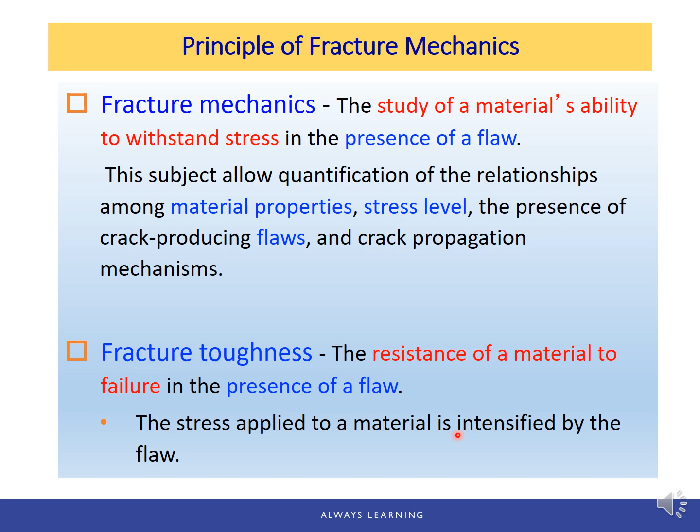We will also use another term, which is the fracture toughness. Fracture toughness is the resistance of a material to failure in the presence of a flaw. And the stress applied to the material is intensified or amplified by the flaw.

After comparing the ideal materials to real materials, we find that the measured fracture strengths for most materials are significantly lower than those predicted by theoretical calculation based on atomic bonding energies. So here we have the stress-strain curve for a perfect material with no flaws. And this stress and strain, especially for the tensile strength, is calculated based on atomic bonding energy.

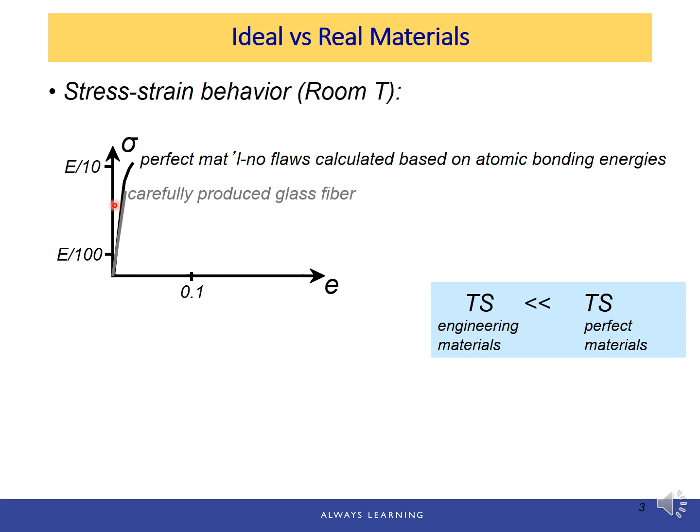Versus the real material, and this is a carefully produced glass fiber, which has a tensile strength that is lower than the ideal material. And also it's quite brittle because it doesn't have the plastic deformation. And next is typical ceramic. Again, it's a brittle material, but the tensile strength is much lower than the perfect material.

And next, we have typical strengthened metal. It's quite ductile, but again, the measured tensile strength is much lower than the perfect material. And lastly, we have typical polymers. It's even lower. So therefore, we say the tensile strength of the measured engineering materials are much lower than the tensile strength of perfect or ideal materials based on the calculation of atomic bonding energies.

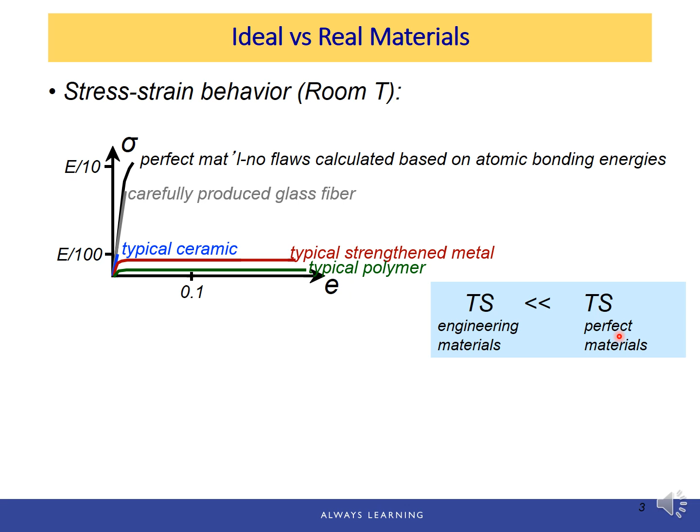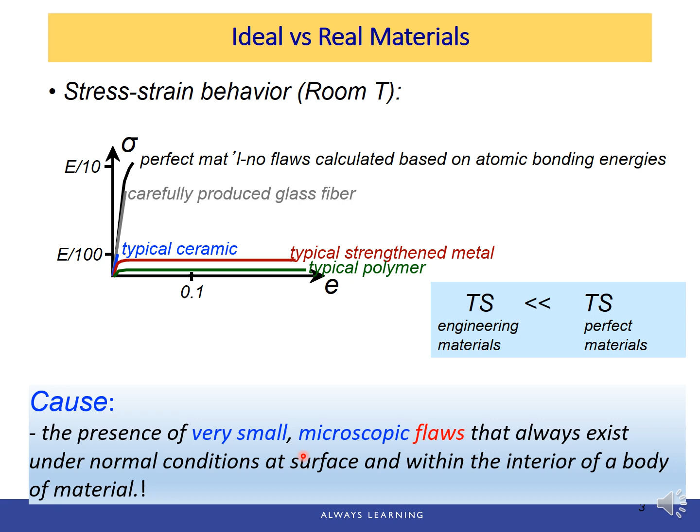And the reason can be explained by the presence of microscopic flaws or cracks that always exist under normal conditions at surface and within the interior of a body of the material. Flaws and micro voids at the surface of the material or within the material are stress concentrators or amplifiers.

So if the applied stress is sigma 0 on the piece of metal, at the tip of the crack, this value is much larger than the applied stress. So the relation between the stress at the crack tip here and the applied stress is described in this given equation, where sigma m is actually the maximum stress within the material at the tip of this crack, equals 2 times sigma 0, which is the applied stress, times square root of a over rho t. So let's explain the terms in this equation.

Rho t is the radius of curvature of the crack at the tip. And sigma 0 is the applied stress to the entire material. And sigma m is the stress at the crack tip, which is the maximum value. And a, if the crack is at the surface, then a is the length of the surface crack. But if the crack is within the material, is an internal crack, then we need to divide the length of the crack by 2 and then use in this equation. So we can say that half a is the half length of an internal crack.

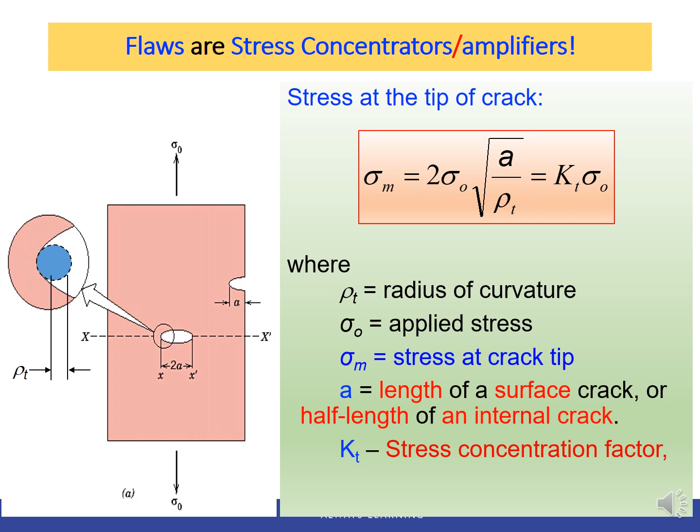And sometimes we combine this coefficient, 2 times square root of a over rho t, and we call it the stress concentration factor K sub t. The stress concentration factor K sub t, if we rearrange the previous equation, we can see this K sub t actually is the ratio between the sigma m and sigma 0, where the sigma m is the maximum stress at the crack tip, and sigma 0 is the nominal applied stress sigma 0.

So if you take a look at this stress profile, we can see that the magnitude of this stress decreases with distance away from the crack tip, or the stress at the crack tip is a maximum value. It's much larger than the applied tensile stress sigma 0. Or we can calculate K t, the stress concentration factor, with the length of the crack and the curvature at the crack tip, or the radius of the crack tip. So the stress concentration factor K t measures the degree to which an external stress is amplified at the tip of the crack.

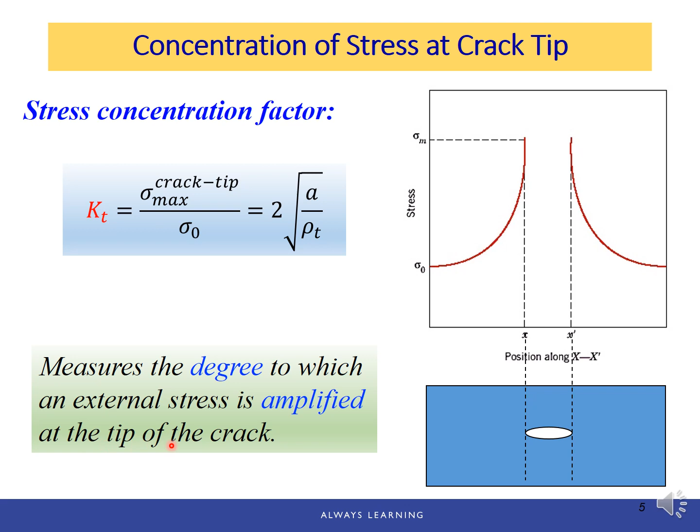Using fracture mechanics principles, an expression has been developed that relates the critical stress for crack propagation and crack length. This critical stress for crack propagation is the stress for the crack to grow. So when the applied stress is above this critical stress, then the crack starts to propagate or grow. But if the stress is below this critical stress, then the crack will not grow. So that's the critical stress for crack propagation.

And crack length is a. And now here we say the fracture toughness is K sub C. Didn't we just use a very similar symbol for another term, which is K sub T? So don't get confused by the two terms. They are very similar, but they are different. Fracture toughness is K sub C, and K sub T is the stress concentration factor. And this factor is a dimensionless number because it's the ratio between two stresses.

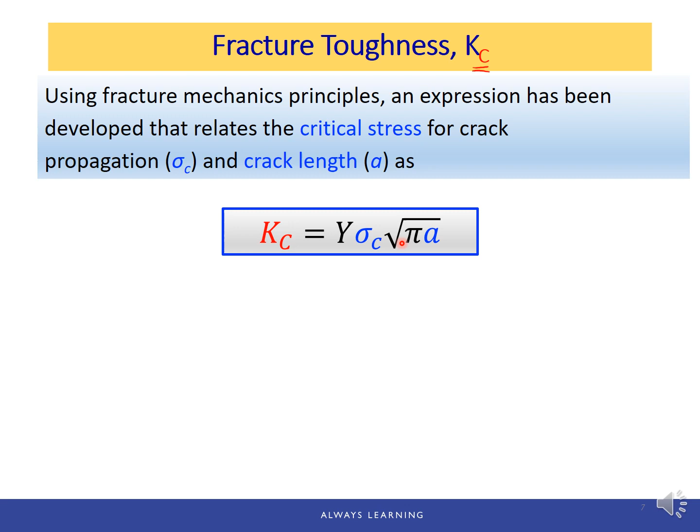Now, this relation is Kc, the fracture toughness, equals Y times sigma C, which is the critical stress for crack propagation, times the square root of pi a, where Kc is the fracture toughness, a property that is a measure of a material's resistance to brittle fracture when a crack is present. And it has a unit, which is the unit of stress, megapascal, times the unit of the square root of a, the square root of length, square root of meter, or psi, pound-force per square inch, times square root of inch. And sigma sub C here is the critical stress for crack propagation, and a is the flaw size.

Same idea: if it's an internal flaw, then we need to divide the entire length by 2. That will be the a value. But if it's a surface flaw, then it's just a. The length is just a. And Y is a geometry factor. If we have an internal flaw, then Y equals 1.0. But if it's a surface flaw, we use 1.1 for Y.

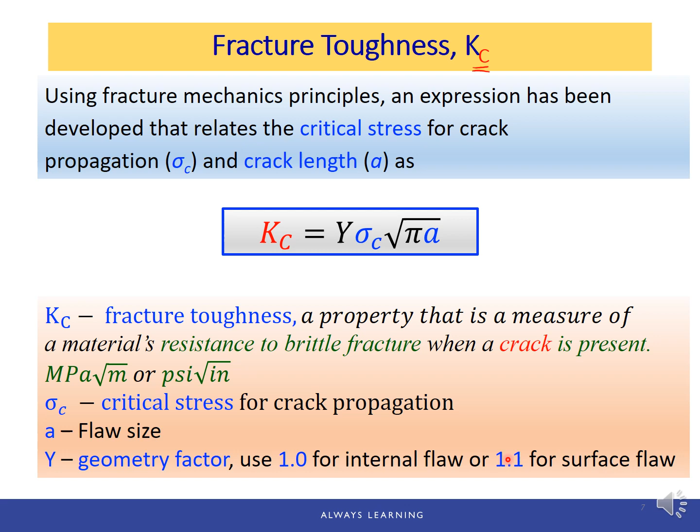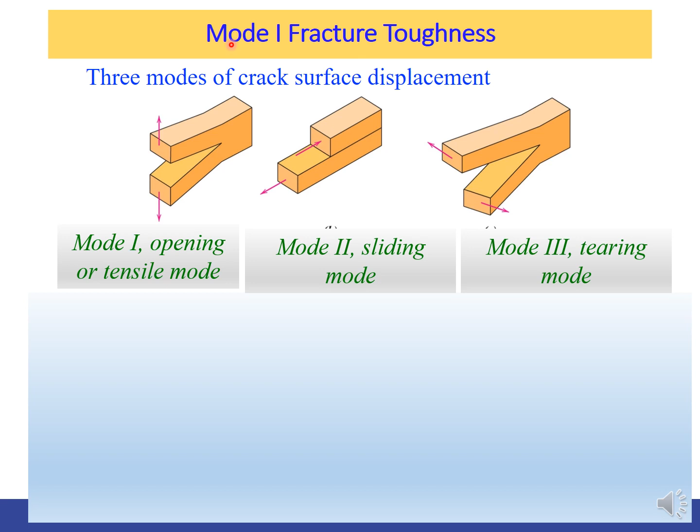For the crack surface displacement, there are 3 different modes, which are shown in those figures. The first mode is called the opening or tensile mode. The second, mode 2, is the sliding mode. Mode 3 is the tearing mode. But in this class, we will only focus on mode 1, fracture toughness, which is the plane strain fracture toughness.

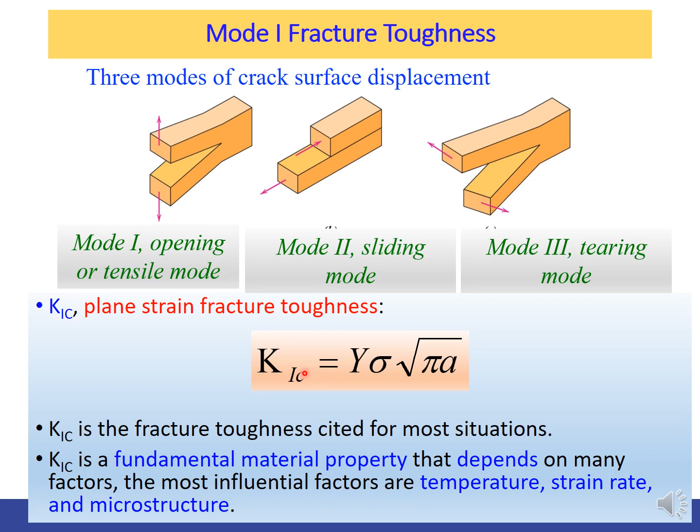And to calculate the plane strain fracture toughness is a very similar expression as before, but we just add a Roman numeral 1, which looks like I here, in the subscript to indicate this is the plane strain fracture toughness. It equals Y, which is the geometry factor, times sigma, which is the applied stress. So instead of the critical stress for crack propagation, sigma here used for plane strain fracture toughness is the applied stress. Times the square root of pi times a, which is the surface crack length, or half of the internal crack length. So KIC, the plane strain fracture toughness, is cited for most situations and is a fundamental material property that depends on many factors, and the most influential factors are the temperature, strain rate, and microstructure. But since it's a material property, in most of the calculations this KIC will be given, or you need to look for it based on other given information.

So in summary, the plane strain fracture toughness, KIC, is a material property. It is the resistance of a material to brittle fracture in the presence of a crack or a flaw. And this is the equation. In this equation, KIC is the plane strain fracture toughness, and sigma is the applied or imposed stress. And a is the flaw size. F or Y is the geometry factor. And we use 1.0 for an internal flaw, or 1.1 or 1.12 for a surface flaw.

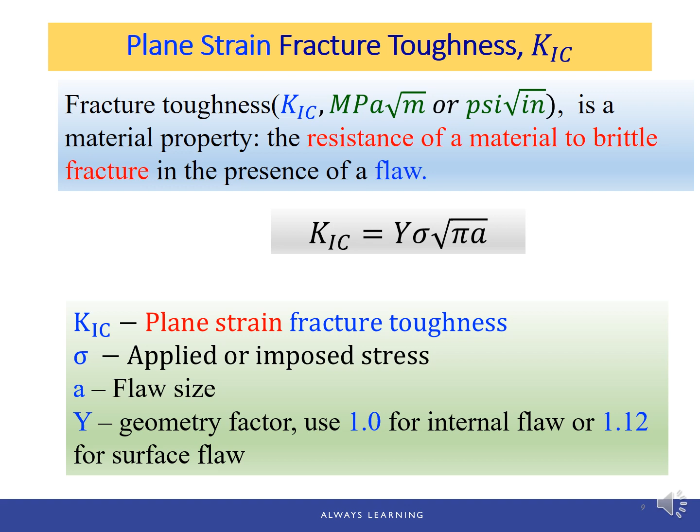So be very careful with the A values and the geometric factor. Sometimes you can see this factor expressed as F, or sometimes we use Y. They're all the geometry factors in the calculation of the plane strain fracture toughness. A is the flaw at the edge or on the surface, and if it's a surface flaw, then we use the length of this flaw, A, in the calculation.

But if it's an internal flaw, then 2A is the entire length. Therefore, in the equation, we need to divide the entire length by 2 to get the A value in the calculation. And for the geometry factor, the surface flaw has a geometry factor of 1.12, and the internal flaw has a geometry factor of 1.0.

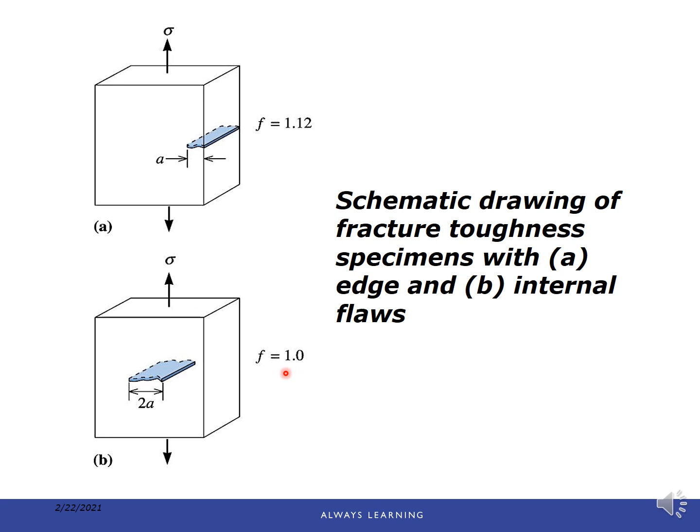So when we design against fracture growth, 3 variables must be considered. The first one is the plane strain fracture toughness, which is the material property. If we have chosen the material to be used in a certain application, this plane strain fracture toughness is determined. The second variable is the applied or imposed stress. When we design the structure, we may already know what the load is, or the value of the applied stress on the component. And A is the flaw size.

With 2 given variables, we can solve for the third one. So that will give us different types of design projects. The first type is if we know the material, so we know the plane strain fracture toughness, and we can also measure the internal flaw size or the flaw size at the surface. When we know those 2 values, we can find the maximum allowable applied stress on the component. The stress must be no bigger than this value. Again, this is a rearrangement of the plane strain fracture toughness equation.

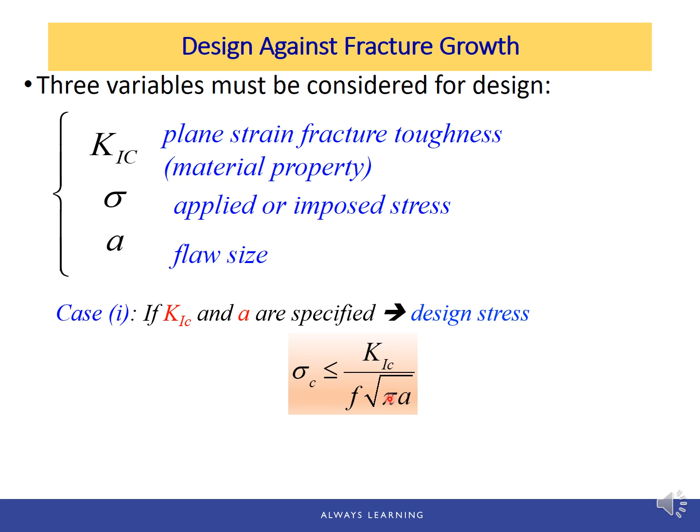The second design we can do is if we know the material, so we know the plane strain fracture toughness, and we know the applied stress, then we can calculate the maximum allowable flaw size. Again, this is the maximum allowable flaw size. As long as the flaws are smaller than this one calculated from the given equation, the material is safe to be used in the component or in the structure. Keep in mind that flaws or micro cracks are always present in the material. There is no perfect material.

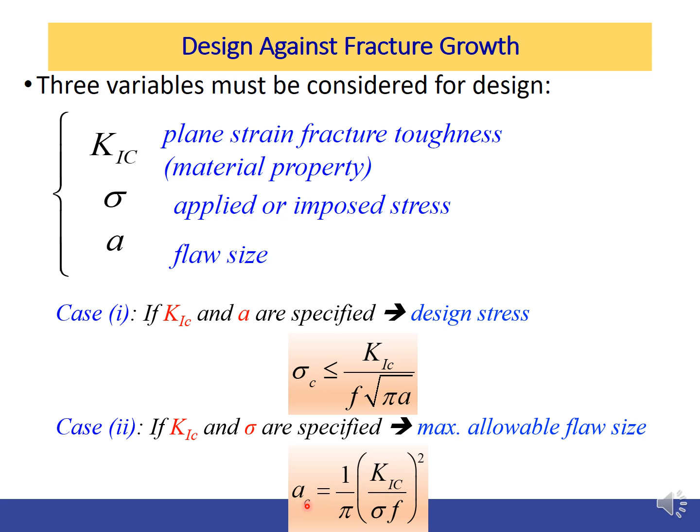Example 1. A large steel plate used in a nuclear reactor has a plane strain fracture toughness of 80,000 psi square root inch, and it's exposed to a stress of 45,000 psi during service. What is the maximum allowable size of a crack at the edge, which means at the surface of the plate, before the crack is likely to grow at a catastrophic rate? Assume the geometry factor F equals 1.12. Again, in some resources you will see this letter F. In some books, for example the textbook, it uses the letter Y for the geometry factor. But we know they are the same.

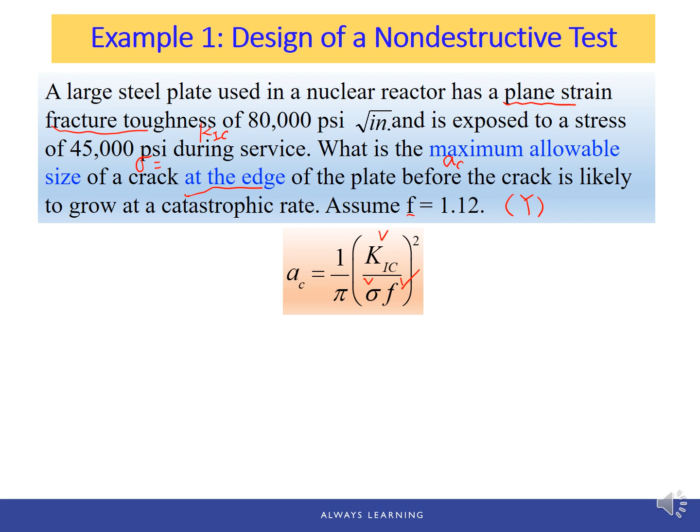Clearly, this problem involves the plane strain fracture toughness, which is K_IC, and the applied stress is given here, and we're looking for the size. The maximum allowable size, which is the critical size for the crack at the edge. Clearly we're going to use the equation transformed from the plane strain fracture toughness equation, where A_C is expressed in terms of the plane strain fracture toughness, the applied stress, as well as the geometry factor. All of the values are given, and we just need to use them to calculate the critical size or the maximum allowable size of the crack. Or you can start from the plane strain fracture toughness equation, substitute the values, and then solve for A. And A is 0.8 inch, which means this is the maximum allowable size of the crack at the edge of the plate. As long as the cracks are smaller than this maximum size, then it is safe to be used.

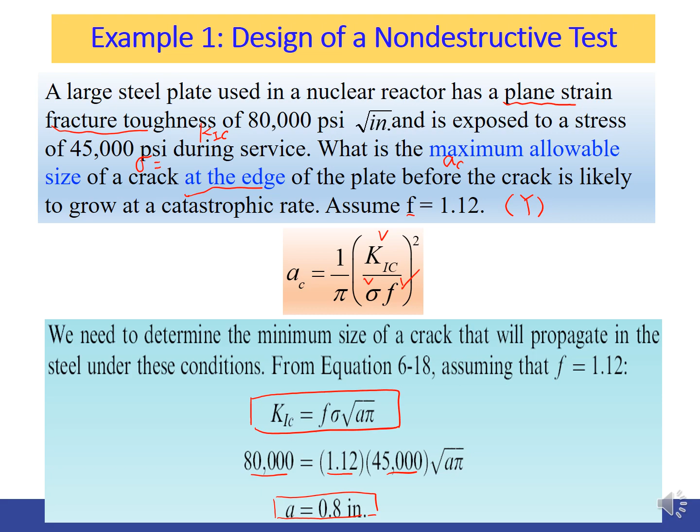Design example 2, aircraft wing. An aircraft component is made from a material that has a plane strain fracture toughness of 26 megapascal square root meter. It has been determined that fracture results at a stress of 112 megapascal when the maximum internal crack length is 9.0 millimeter. And for the same component and alloy, compute the stress level at which fracture will occur for a critical internal crack length of

4.0 millimeter. So let's write down the given information and see how we should solve this problem. First, the fracture toughness is given and the applied stress is given. Since we're looking for another applied stress level, let's call this situation 1, so case 1, sigma 1, when the applied stress is 112 megapascal and the maximum internal crack length, the AC, is 9.0 millimeter.

And now for the same component and alloy, case 2, everything is the same except we know the crack size now is AC2, which is 4.0 millimeter, and we are looking for the stress level, which is sigma 2 equals what? Well, again, we will start from the plane strain fracture toughness equation, which equals Y times sigma, the applied stress, times square root of pi a.

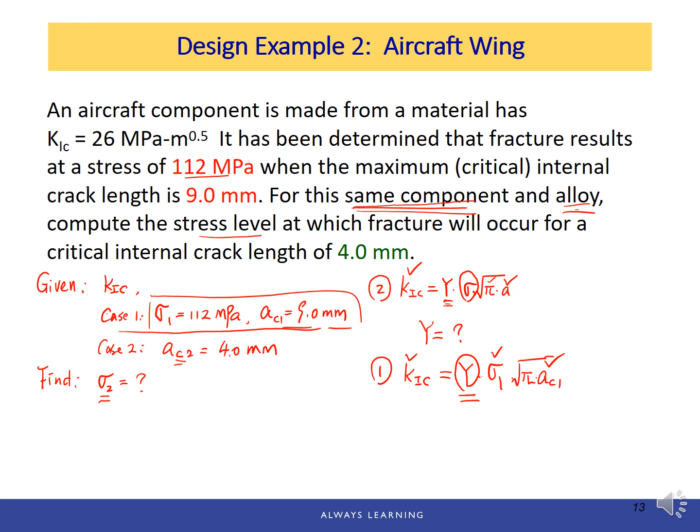KIC equals Y times sigma 1, which is given, times the square root of pi times AC1, and the critical internal crack length AC1 is also given, and now the only one that is not known is the Y. So that will be our first step: get the Y value from case 1. And the second step is, with the calculated Y value, we calculate the applied stress level in the second situation when the crack length is 4.0 millimeter.

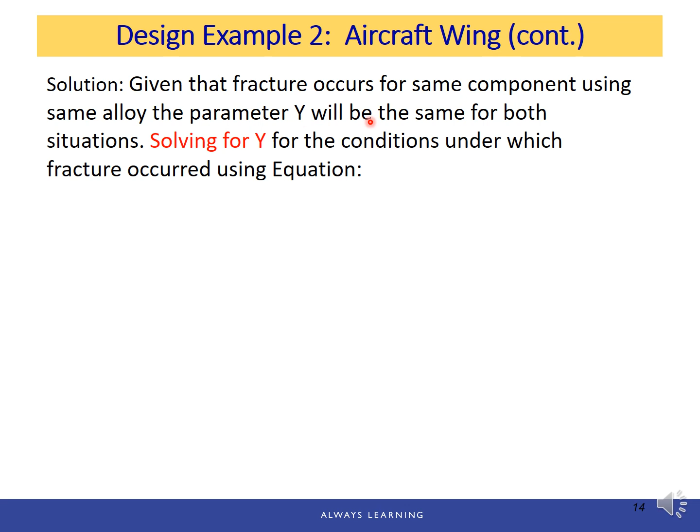So let's write down the solutions. Given that fracture occurs for the same component using the same alloy, the parameter Y will be the same for both situations. Solving for Y for the conditions at which fracture occurred using this equation, the A value is 9.0, and don't forget to convert the length from millimeter to meter. The critical stress sigma C is 112, the fracture toughness is 26, and Y is solved to be 1.38. Next, we solve for the critical stress level for the given crack size, which is 4.0 millimeter.

And this critical stress level is calculated to be 168 megapascal. Again, don't forget to convert the units, especially for the length of the crack. It's a very small value, so the unit is not meter, it's millimeter, but you need to convert it to meter for your sigma or Y to have the correct unit.

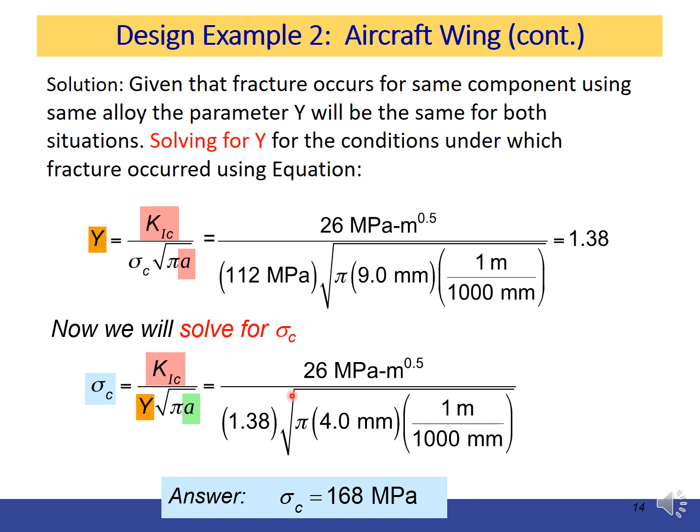So fracture mechanics is very important. First, it can help us to choose the right material. If we know the maximum size A of flaws in the material and the magnitude of applied stress, we can select materials with enough fracture toughness to prevent flaw growth. And second, it can help us to design the component. If we know the maximum flaw size of the material, which is the A value, we can design the component such that the maximum stress on the component never exceeds the fracture toughness.

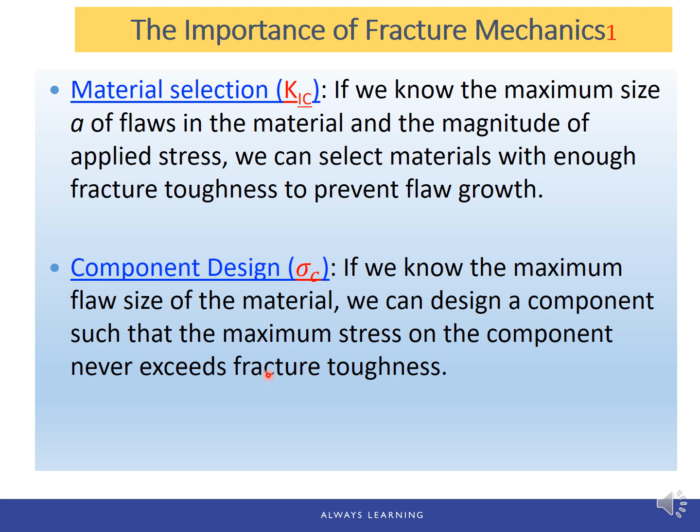It can also help us to design the processing method. If we know the component design and applied stress sigma, we can develop a manufacturing method such that the maximum flaw size will be below the critical size.